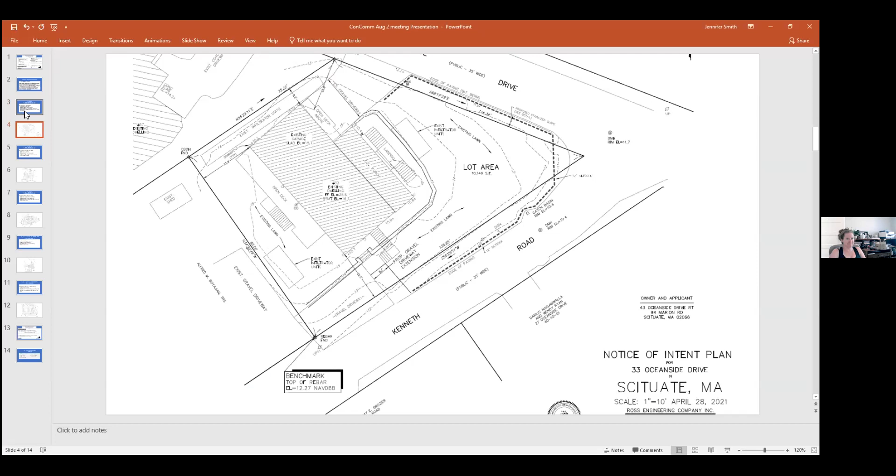So if you want to continue it to the 16th, that's my second motion. Who made that? I made the motion, Penny made the second. Thanks, Richard. So all in favor? Jen, yes, and Frank, yes. Thank you. Thanks, Paul. Good luck.

19 Blanchard Road. On August 2nd, 2021, at 5:30 PM, the Town Hall Scituate Conservation Commission will hold a wetlands hearing under Chapter 131, Section 40 of the Massachusetts General Laws and Section 30700 Town of Scituate Code of Bylaws, regarding the application of Nancy Hayes for work related to an in-ground pool at location 19 Blanchard Road, Scituate. Abutters and other interested parties are invited to attend. Information to access the meeting is available on the agenda posted on the town website.

And who do we have? Thank you. Hey, Paul. The applicant owns a home at number 19 Blanchard Road.

The property is in a FEMA flood zone, AE, elevation 14. There are no wetlands within 100 feet of this lot, but because it's in land subject to coastal storm flowage and a FEMA flood zone, the applicant has filed a notice of intent to install an in-ground pool to the rear of the house with pervious paver decking around it, which will be 5 feet wide. There's no changes proposed in the existing elevation of the land. The land is relatively flat as it is. The access to construct it will be off to the right side of the house. It's fairly straightforward. There are no performance standards for this, as it's in land subject to coastal storm flowage.

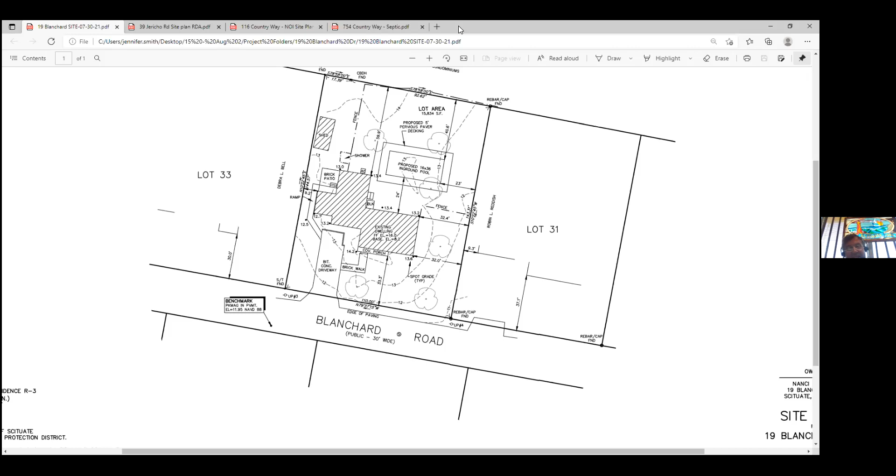Penny? Just where's north, east, west, south? I can't see it on the plan. Blanchard Road runs to the east... Blanchard Road sort of goes east-west. Yeah, off Kent Street, I got that much. Yes, so the back of the lot is north. Right, Paul? Okay.

Wait a second, see the Townway north there, the extension, so it's the marsh? And how much flooding is down there, I wonder? When a storm comes in, is the pool gonna float away? The pool, no, if anything some water may get into it. All right, yeah. There's no wetlands there, Penny, this is just a flood area. Well, I see with Townway Extension...

I guess I'm confused. Go ahead, Jen. Gilson Road. There's a marsh around it, but there's also uplands around it. Right, okay, all right, that's why I'm... What are you talking about? It's wetlands, it's marsh. Okay, but I have the same confusion, Penny, it's not abutting that. Yeah, no, I see what you're saying. It's not at the end of the street. Right, okay.

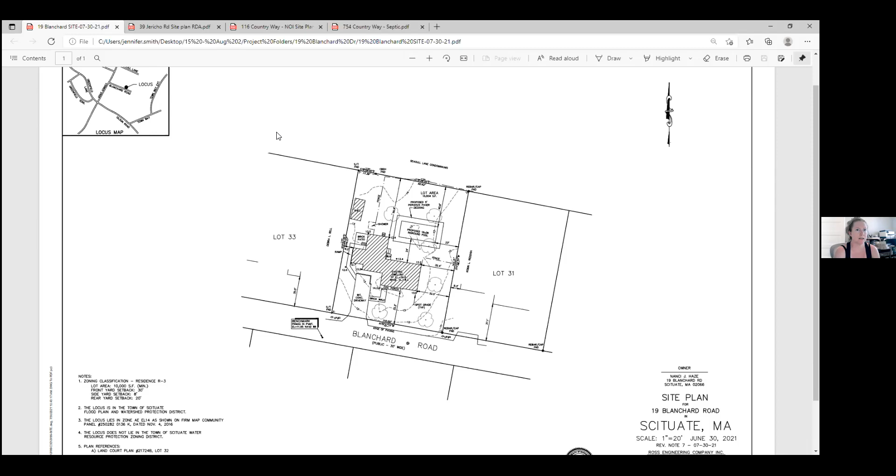And what did you say the decking was around the pool? Pervious pavers. Okay, we'll call it out on the plan. Yeah, I just couldn't remember.

Okay, I think I'm good for now, Frank. Okay, Amy, go ahead.

I would say that this project is approvable under the orders, resource areas, land subject to coastal storm flowage. I agree that there's some detail lacking in the plan. It would be nice to have a detail for the installation of the pervious pavers, since they're only pervious if installed in a certain way. The fence is missing too, but nothing we can't condition.

And they're skating on the edge here - 1.7% is all it's going to take to bump them over for a stormwater permit. That's why these things matter, because Scituate regulates stormwater on projects like this when they meet certain standards or thresholds. Those would be my comments.

Okay, do we have anybody in the audience that wants to speak to this? So if you can raise your hand, Nancy Hayes - we'll call on you. I see a raised hand, that's Nancy, the owner. Somebody could unmute her. You're unmuted. Thank you, guys.

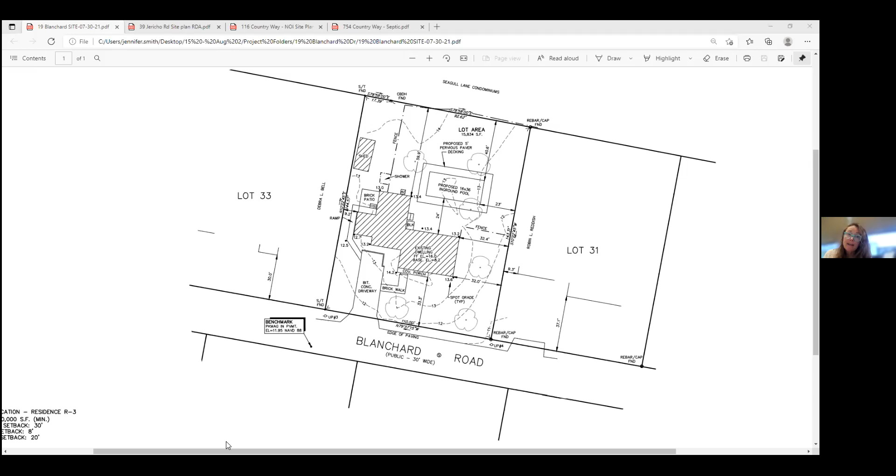Okay, does anybody have any questions while we have Nancy on? I don't have any questions, I just think if we close this we need to make sure that the detail on the pavers is part of the information we get for conservation. Amy, are you comfortable with that? Yeah, I think we could do that. Okay, motion to close.

That's Penny, second that's Jen. All in favor - Richard, yes. Frank, yes, with the changes or additions we talked about. Great, thank you very much. Good luck with the pool, hopefully you'll get a little time in this summer.

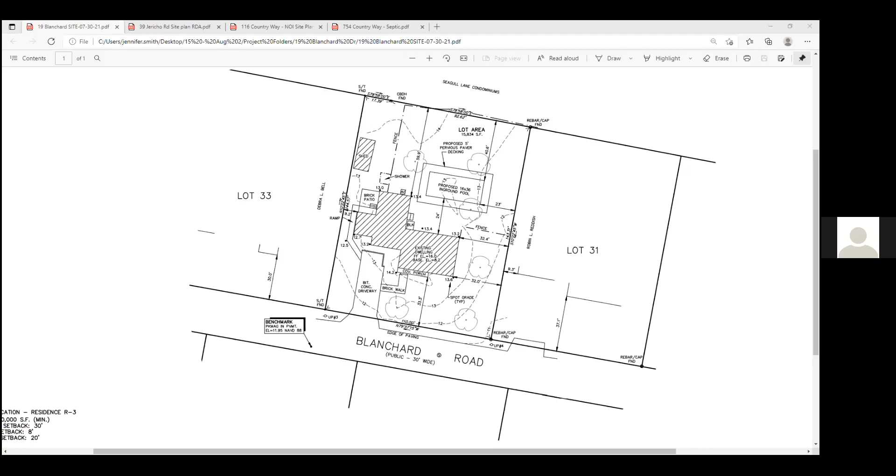I appreciate it. Can I just ask, what is the next step for me now? So I understand we're approved, but when can the pool actually get put in because of the delay? When can we build? So you have to get the orders, and then you have to get those recorded.

Hold on one second. Let me back up a little bit here. Can we close and issue, Amy? We could, although it's two weeks when we would formally issue, but we could make that vote and it'll just get put in queue. But Nancy, so the answer to your question is it's going to be a few weeks - when you get your orders you'll record them and then there's a 10-day appeal period.

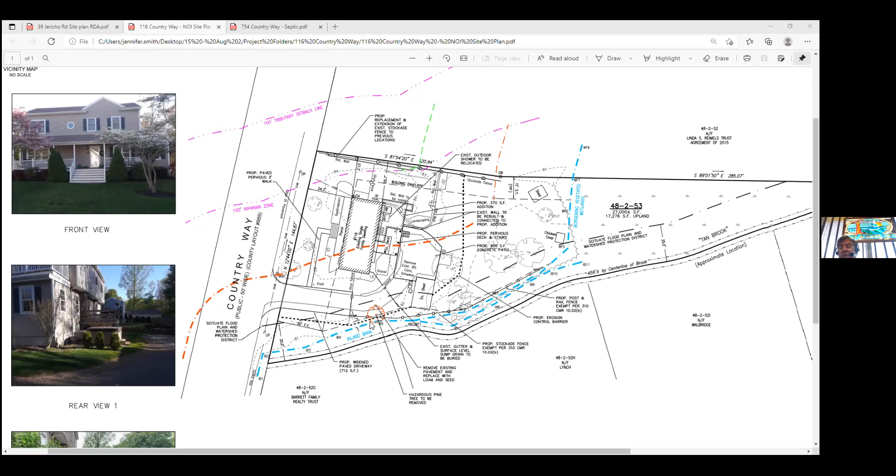On August 2nd, 2021, during the 5:30 PM meeting at Town Hall, the Scituate Conservation Commission will act on the request of ZORJ Holdings LLC for a determination of applicability of the Massachusetts Wetlands Protection Act and the Scituate Wetlands bylaws for activity related to repairing a septic system on property known as 754 Country Way, Scituate.

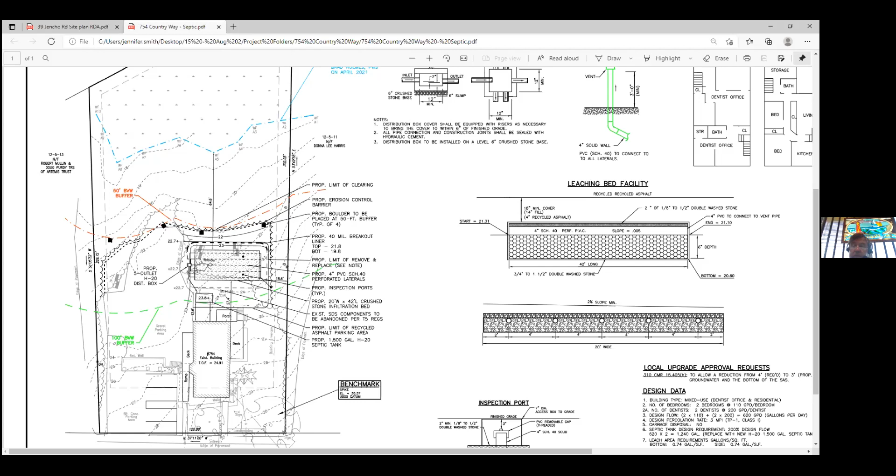That's Penny. We have a second. I'll second it. That's Richard. All in favor? Jen? Yep. And Frank, yes. Thank you. Thank you very much.

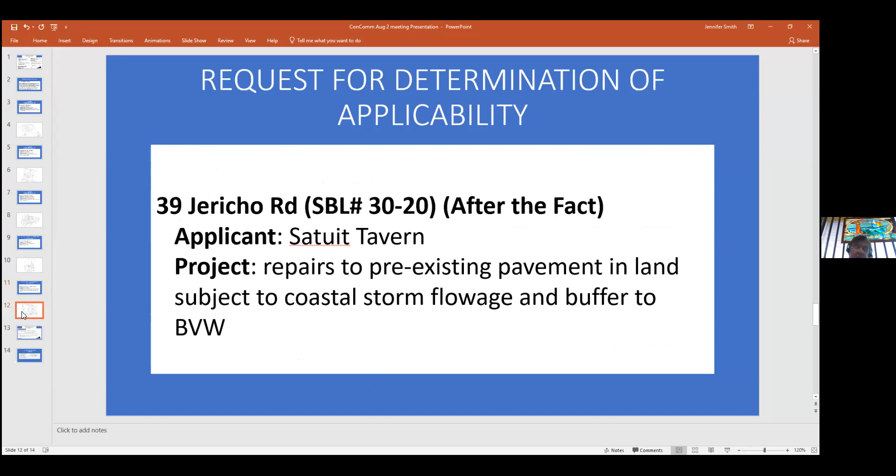39 Jericho Road. On August 2nd, 2021, during the 5:30 meeting at Town Hall, Scituate Conservation Commission will act on the request of Satuit Tavern for determination of applicability of the Wetlands Protection Act and the Scituate Wetlands bylaws for activity related to repaving the parking lot at property known as 39 Jericho Road, Scituate. Abutters and other interested parties are invited to attend the meetings. Information on accessing the meetings is available on the agenda posted on the town website.

This is an after-the-fact filing, and I remember the day you called me. Yeah, and Michael Sicitella is on the phone, so I'm going to unmute him. Okay, all right.

Here you go. Good evening, everybody. Good evening. Hi, Michael.

So why don't you fill us in, please?

Sure, thank you. I'm here with two of the owners, Jay Mulvey and Debbie Mulvey. James Mulvey, who you probably know better as you've seen him at the restaurant a lot, just got out of the hospital, so he's not able to attend tonight. So this is a very unusual situation.

The Satuit Tavern was purchased back in 2001. It was previously the Blue Mooring. The building subject to the property had been there for probably more than 10 years before that. There were some improvements made after the property was bought to the building, but what you see when you pull into the place is primarily there since 2001.

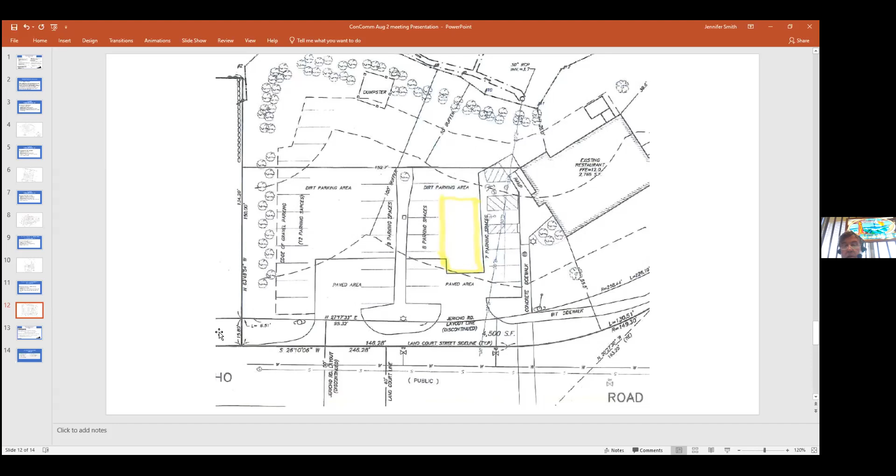Penny makes a motion to continue this until August 16th. Richard seconds. All in favor: Jen, yes, and Frank, yes. Thank you.

Could we do the orders of conditions quickly? The other ones are going to require some conversation. Do you want to do them individually or just name them in one motion? I think one motion, since they were all very standardized.

I make a motion we accept the orders of condition as written for 316 Hadley Road, 0 Oceanside Drive, 146 Central Ave, 142 Hummerock Beach Road, and 8 Newell Street, the dock. I have a problem only with 8 Newell Street because I'm recused from that. That's right, and that would only be 3 of us, so maybe that order can't be issued tonight, Amy.

Okay, so let's omit 8 Newell Street. Otherwise, that's Penny's motion. Do I have a second? I'll second that, as long as Newell Street's removed. Richard seconds, all in favor, Jen yes, and Frank yes. So we'll have to do Newell Street at the next meeting.

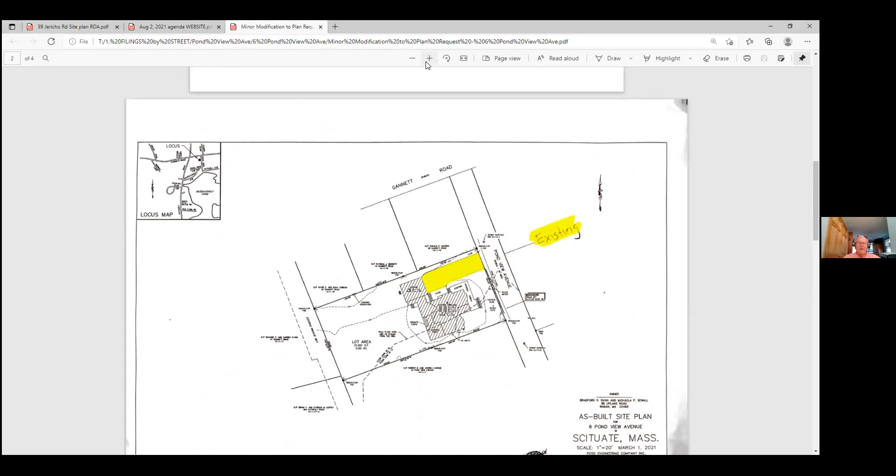But did I read it that they want to pave something that wasn't to be paved? Yeah. So how do we feel about that? A lot of times we don't like that. This describes just what they want to do. So that's existing. Can we scroll down to proposed?

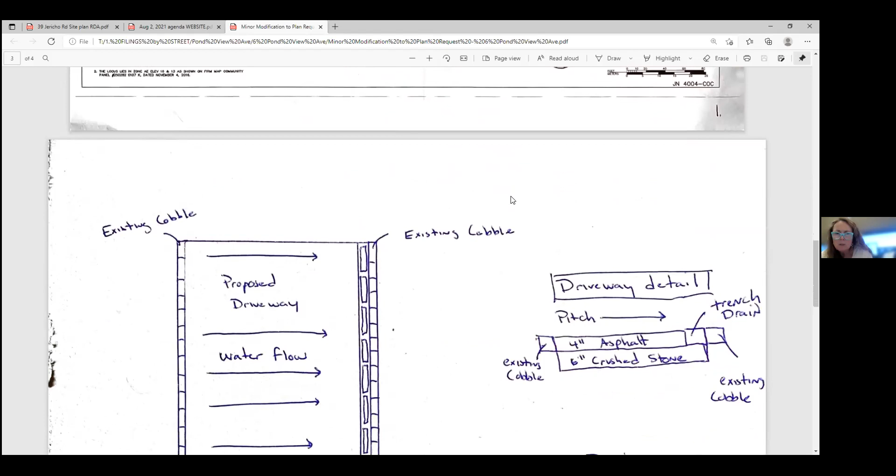So they want to add drains on the side of the driveway and pitch it. What kind - again, I'm not an engineer at all. The trench drain, I can figure some of that out, but I guess the question I'd have as a non-engineer: does that take care of as much water as if it's a pervious surface as was planned? I think if I remember right, we allowed something very similar off of Old Oaken Bucket Road.

There's a long driveway that runs alongside the cranberry bogs. They came in originally with a set of orders that it was a gravel driveway, and they were having difficulty maintaining it. They came to the commission a couple years ago with almost a similar plan. The idea, Richard, would be that the water would shed - they pitched the driveway a little bit, the water would shed into that crushed stone and then be absorbed in some of that crushed stone that's under the asphalt, as opposed to being absorbed directly into the earth driveway.

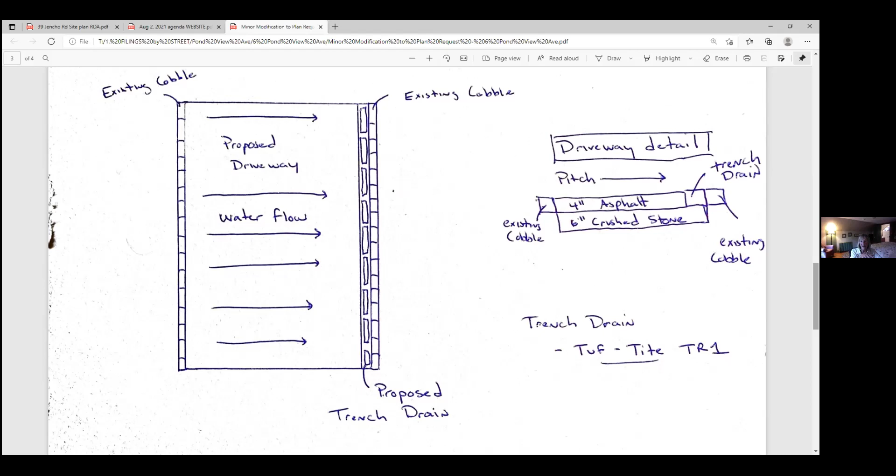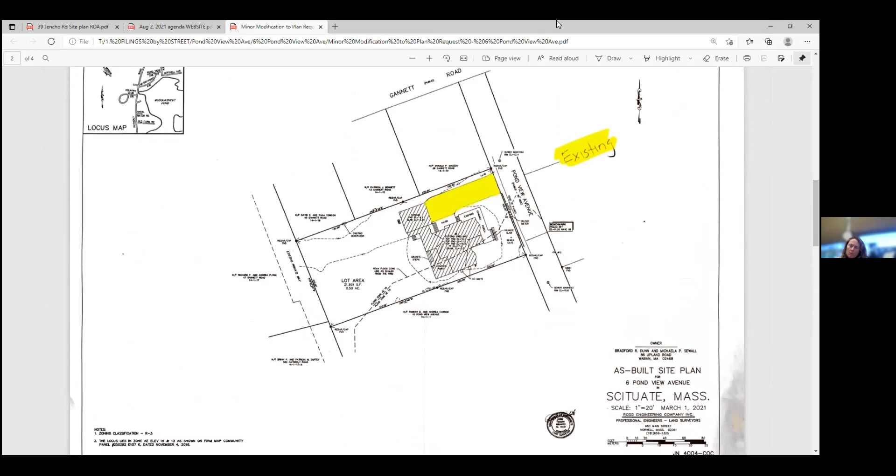Another house, farther back towards the turn before you get to Surfside, back the other way. Jen, can you pan back closer to Gannett? Thanks, this is one over from Gannett. Wait, it's one over from Gannett? Oh okay, sorry, I'm getting it wrong then. Me too, Jen. Oh, Gannett's up there. Oh yeah, wow, I know which one it is now. It's a totally lovely new house, not that it matters that it's new, but you know what I'm saying. Yeah, they've done such a beautiful job with it, before the sharp turn.

So do we have to vote on this? I'm pretty sure it's on land subject to coastal storm flowage. I'm wrong, I apologize.

Do we have to vote on this, Amy? You would, yeah. Can I make a motion, Frank? Sure. I'll make a motion for the request of 6 Pondview Ave for the minor modification of the driveway.

Wait a minute, we've got a hand. Oh, probably in reaction to my inappropriate and incorrect statement. Sorry. All right, well, I'm asking, I'm not sure it's going to work. Oh, here we go, you're unmuted.

Hi, can you state your name and address please? Sure, this is Brad Dunn at 6 Pondview Ave. I was just hopping in to clarify the location of the house, and you all got it perfectly. This is the owner. You got it. You're all set now. Great, thank you so much.

Thank you. Somebody going to second the motion? I'll second it. All right, so we did have Penny for the motion, Richard for second, Jen yes, and Frank yes. Okay, all right.

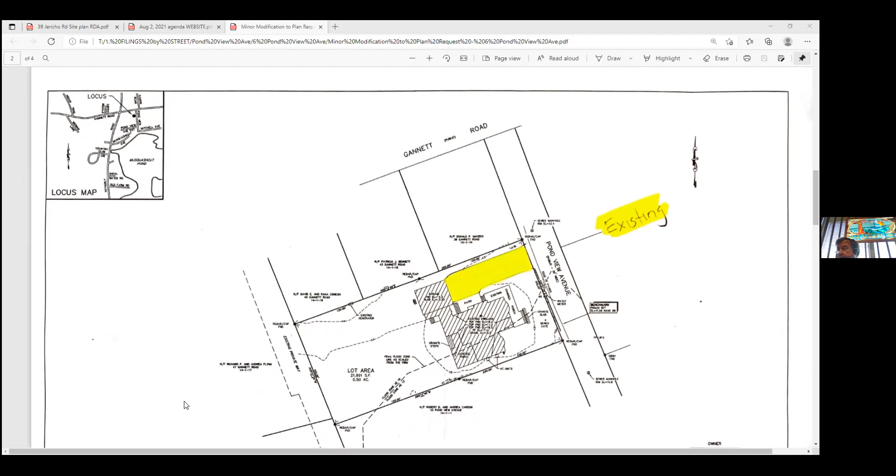Okay, so here's where we add the one for Prospect. All right, so this is one, Jen, I think you were on with this one, but it's another new build. Well, actually they had orders for Phragmites across the street, but it's right on Second Cliff, like over the bridge, take a left, on the corner of Prospect there, new house.

So anyway, most of the project is out of the buffer and out of the flood zone. But in our orders, we pretty much carry a condition that there's no irrigation wells, to be conserving of water, although irrigation wells can't be sited within the 100 anyway, they're not supposed to be. But anyway, the house, just for clarification for Jen and Richard, this is the house that faces the harbor, the brand new one. It faces the harbor and sets up high.

So, anyway, they'd like permission to put an irrigation well out of the buffer. It would be a request for a minor modification for the orders that are still open, to basically allow this irrigation well, even though there's a condition, which is a standard condition in all orders that are subject to wetlands protection.